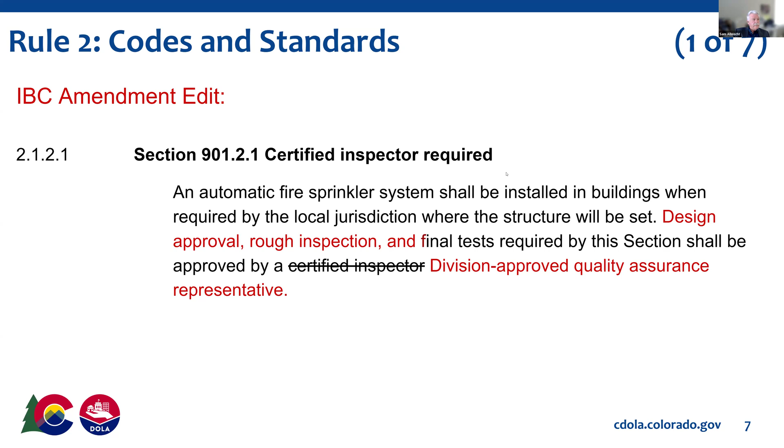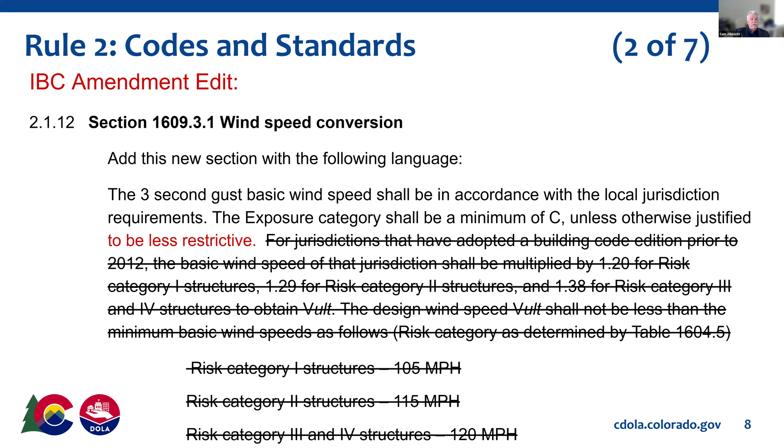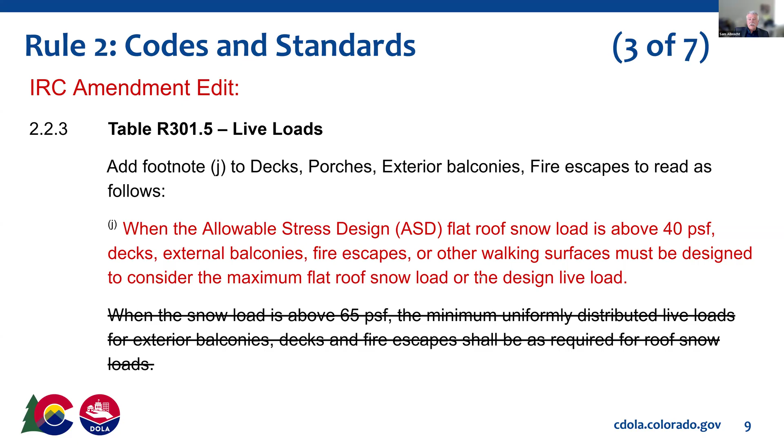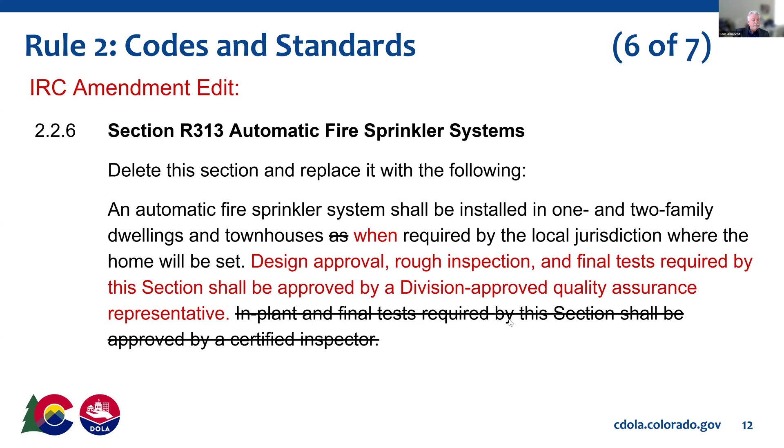All right, so that's the changes in Rule 2 to the code set so far.

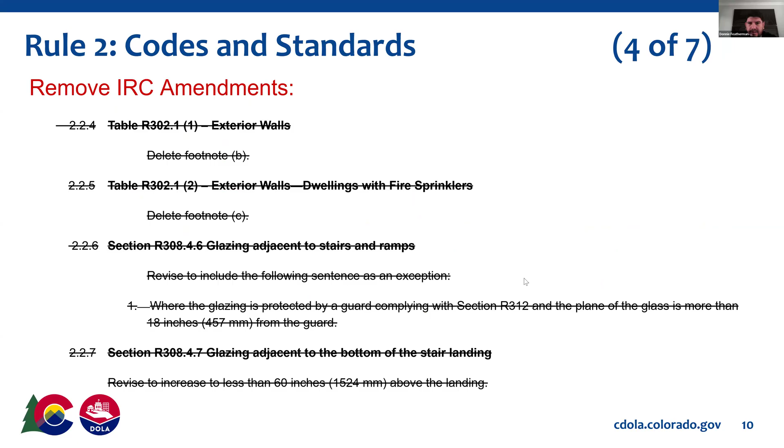Yeah, so what we found is that over the years, individuals that did use the wireless connection for new construction - every time we went out to do the inspections for them, they never got them to actually connect correctly. One would go off, but wouldn't set off any of the others. And so the wireless option, we amended that out as an option for new construction, but kept it in there for existing construction, just so they didn't have to tear down drywall and run wires from each device through the entire structure. They can still have the ability to use wireless in those situations.

Gotcha. So I just want to be cautious that we're not codifying the prohibition of new technologies, is all.

It seems like there's a lot of great products on the market now, and a lot of that is resolved through monitoring systems. Granted, these are larger buildings, so if somebody has a smaller project, it may not be monitored. But there's got to be other ways to work around that, because it's really compelling technology, especially in the context of offsite construction, where that's just more wires that have to be pulled. And if that can be done wirelessly, which the technology is there, I'd hate to see that codified out.

Okay. I may not be. Donnie, any other thoughts on that? No, no other thoughts.

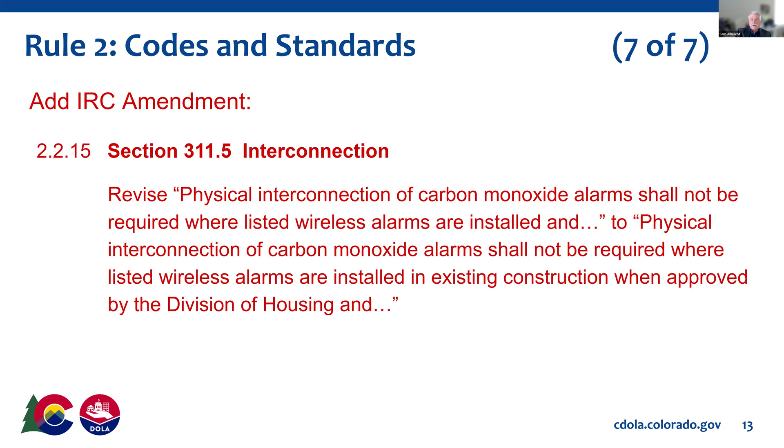Okay, Dean, we'll take a look at that. All right, let's see. Any other questions so far?

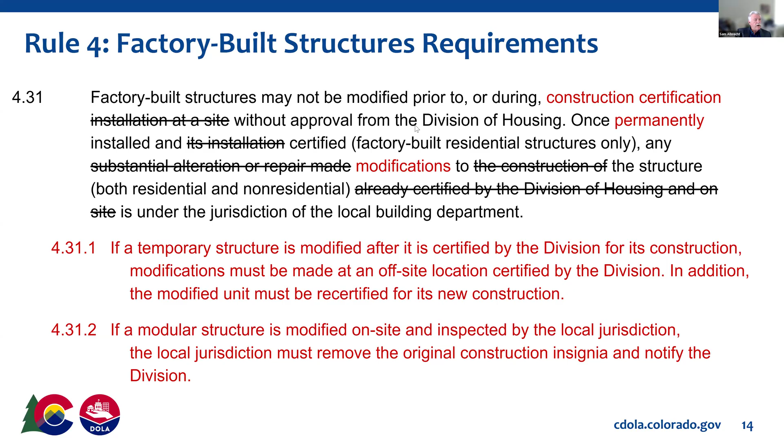Wayne, you had a question in the chat: have we officially defined a division-approved quality assurance representative? We do have that defined, yes.

Donnie, you want to remind me? I know we have quality assurance representative defined, I believe in chapter 1 statute. I believe it's in statute, but I'm looking at it right now. I'll send you the section link. Okay, thanks, Donnie.

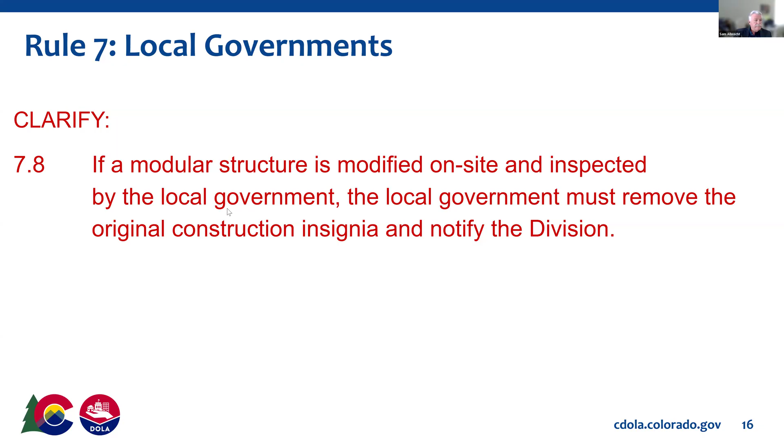All right, some clarifications in the enforcement part of the rules, chapter 12. We added text in 12.3.1 where we clarified that if a construction inspection, investigation, or audit of a factory-built structure finds results or items that need correction, a correction notice will be issued. Then we struck the rest of that because we cover that in another rule here in just a second.

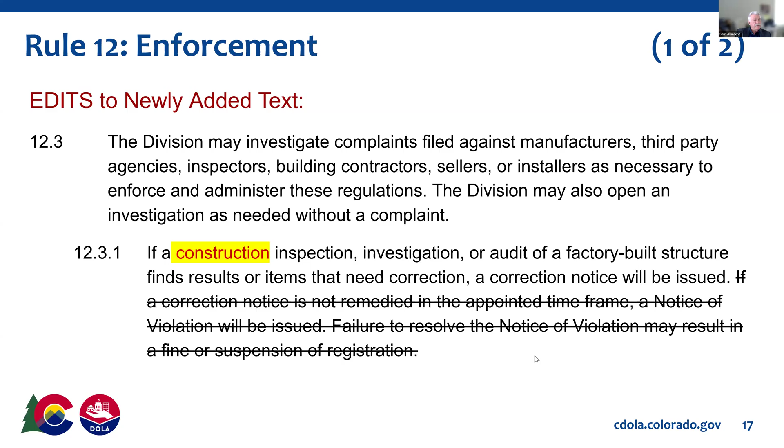Donnie, thanks for that quote on the definition of a quality assurance representative. Hey Sam, okay, I was actually looking at the rules. The statute's helpful, but the rules provide more context. You've got a reference typo in the rules: the authorized quality assurance representative is rule 1.1, but it references rule 1.30 for the definition of a third-party agency. That should be rule 1.35. I'll put those two rules in the chat so Wayne can see the rule clarification of what a quality assurance representative is. Thanks, Mo. Yeah, thank you, thanks Donnie.

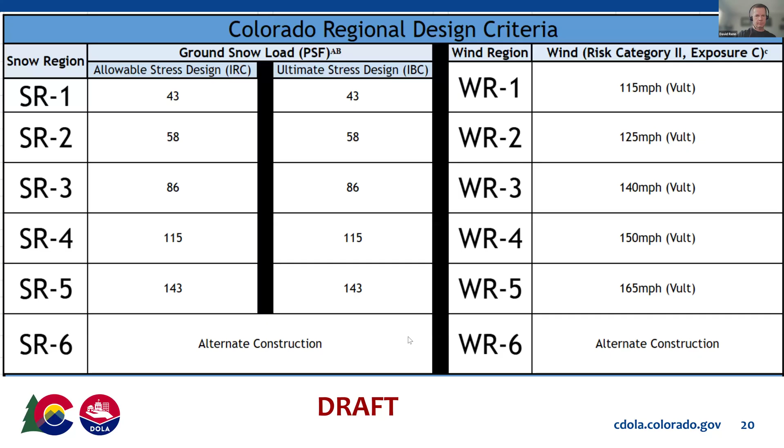Updated what I knew about the state of Colorado updating the SEAC map. Okay, yeah, cool. All right. Any other questions on where we are? All right, let's roll through some of this.

Donnie, any changes from last time to this time on the other minimum design criteria? I know we changed some footnote stuff, and we're going to jump into the footnotes in just a second, but I don't think this has changed much. Also, David, we put a footnote for those snow loads to kind of clarify that a little bit. Hopefully it makes sense when you read the footnote.

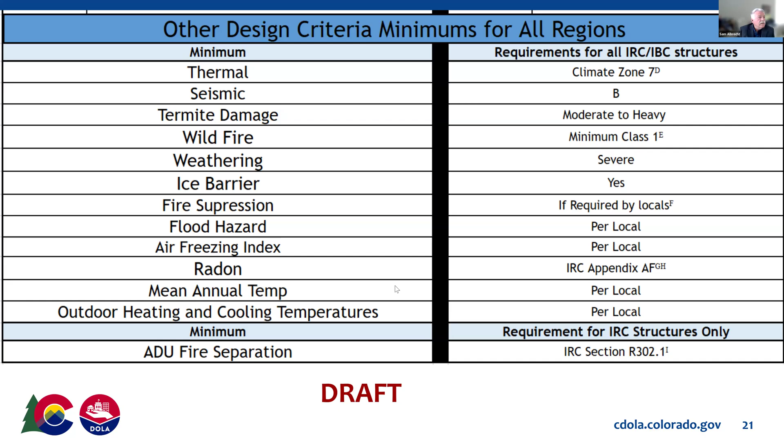So yeah, nothing's changed there, but for the next slides, we're going to kind of give an overview of how you use the table, and hopefully this helps clarify questions you may have about how we actually use the table, how we set the regions, how we use the minimum criteria. The next couple slides will go through that, and then the last slide for this regional code is going to be your footnotes. Correct. Okay, so we've got five slides coming on how to use the table. Donnie, you want to walk us through these?

Yeah, so these are just going to be the procedures of using the table, the general layout of the table itself, how the data is used when doing your design. Regions for regional models are for regional models only, and the use of regional design data is set to establish minimum design standards for structures at their final set location to meet or exceed site-specific requirements. So the example I gave David: if I pick today, or where I'm standing right now, and let's say it was 43 pounds ultimate, and I did the 0.7 ASD conversion, reducing it to 30.1, my site-specific information where I'm at will be the minimum requirement for my site location.

But depending on if the locals had something lower or higher, we would either meet their requirements if we're higher than theirs. But if they were higher than us, we would be lower than theirs, but we would have site-specific information specific to the site where the project's happening, not just a blanket approach saying, hey, across the board our jurisdiction's a 30-pound roof snow load, you're less than ours type of issue.

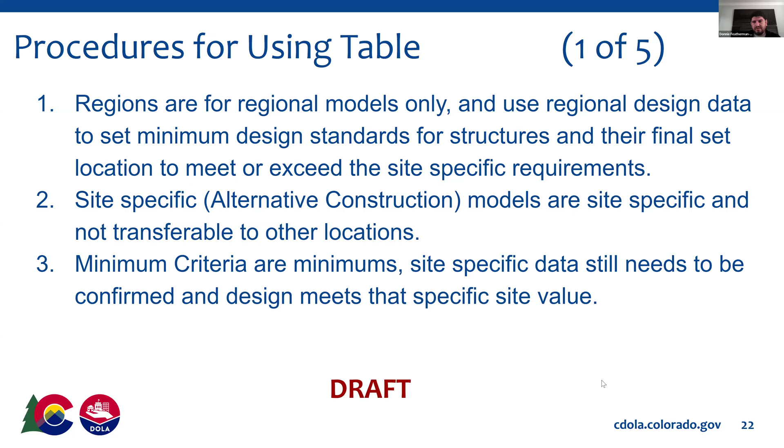Minimum criteria or minimums—site-specific data still needs to be confirmed, and design meets the specific site value. So there are some things on the minimum design table, like seismic. We start at a minimum of B, but there are locations in Colorado that are C. Further down in the slides, we'll get into some methods of confirming that. But the minimum table itself is setting the minimum requirement across the board. If there's a more stringent requirement at the site location, then we must use that more stringent requirement.

Any questions? No. Okay.

So using the regional table of values for the design, we'll use the ASCE hazard tool to confirm site data for snow loads. Locals that have a lesser known value will allow a reduction in regional design, as long as the regional design meets or exceeds the local value and the new model is approved through the Division of Housing.

So let's say I have a design that is Region 1, but using the ASCE hazard tool it puts it slightly higher than Region 1 values. Let's say it's at a 46 ground snow load ASD for residential construction, but the Region 1 is a 43, 30-pound, and the locals allow a 30-pound in their jurisdiction. You should be allowed to use that Region 1 model in that jurisdiction because it will be equivalent to that jurisdiction's design criteria.

Structurally, it'll meet their requirement, right? But you just have to make sure you actually have that plan or that design approved. You don't want to not submit that plan through the Division of Housing, even though the locals approve a 30-pound. You still got to get that plan approved through the Division of Housing or one of our quality assurance representatives.

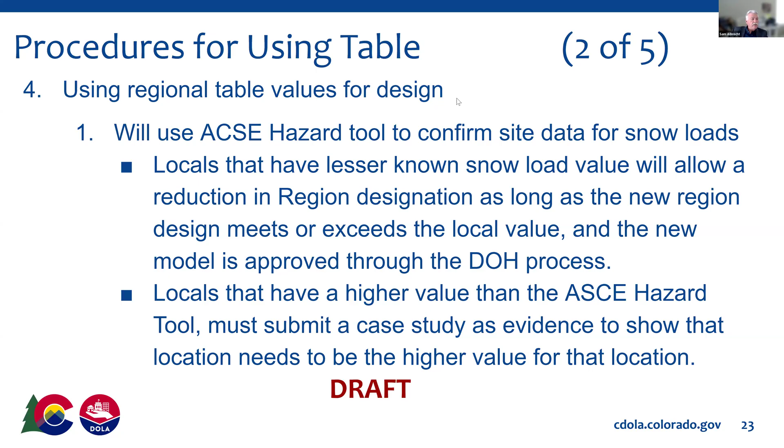Yeah, so we can get this. All right, so just to continue for that section, all the state is 115 Vult. So that's the change I told you we'd talk about a little more from the wind load regions.

That's when I was looking at the different local jurisdictions, and there's quite a few that start at 115. I'd say a good majority of jurisdictions start at 115 at least, especially on the eastern and western flat areas of Colorado. But I was trying to figure out why it was 115.

So looking at the historical ICC books, the ASCE 7-10 actually labeled all of Colorado, except for the special wind region, as 115. And I believe a lot of locals just continued that, even though they adopted the 2018, 2021, and sometimes the 2024 code. They just kept 115, even though the new ASCE hazard tool has it at like 104. I think the highest I saw was 111.

But to stay consistent across the board for Colorado, we felt it'd be best to stay at 115, although ASCE has a lower wind speed for certain locations. The one thing that's not clear is whether the topographic effect was considered as part of that area. We know Colorado is not flat - there are hills, especially in the eastern and western parts of Colorado. So starting at 115 is a good starting point.